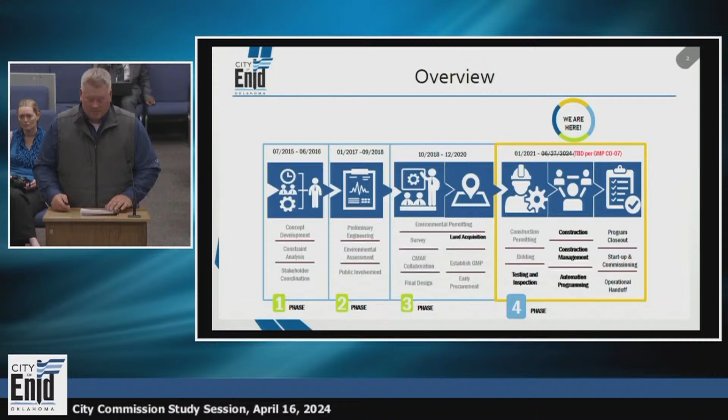The magnitude of the program is obviously a very large build with multiple facilities spanning 70-some miles from Kaw Lake here to Enid, and then the distribution within Chestnut. From a total magnitude, just over 2,400 submittals to date, and currently we only have 7 open. We've got 832 RFIs and growing, with 6 currently open, and 101 field orders to date throughout all 5 of those major facilities.

With regards to the major infrastructure, we have the intake facility, currently flagged at 93% complete out at Kaw Lake. The pipelines are currently flagged at 99% complete — I'll touch on the open items there. Intermediate booster pump station, 99%. The water treatment plant, 75%. And the Chestnut water main, I have it at 65%, but as far as open cut piping, we're actually more approximate to 71 or 72%.

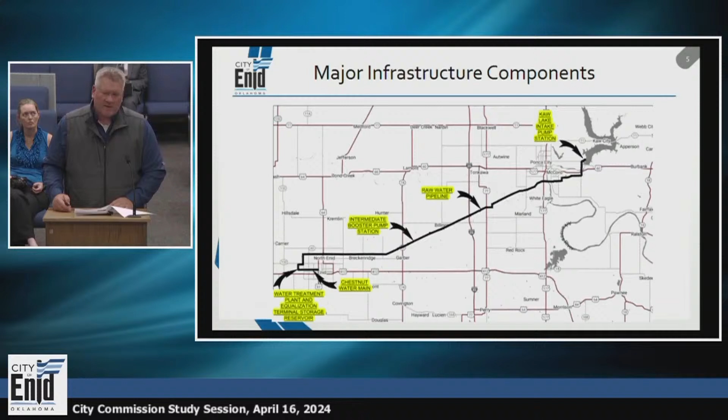The program alignment, again working from Kaw Lake, the 70 miles along the way for the raw water pipeline, 8 pipeline segments. Along the way, the intermediate booster pump station, and then here at Enid, the new greenfield water treatment plant, as well as the ongoing Chestnut distribution main.

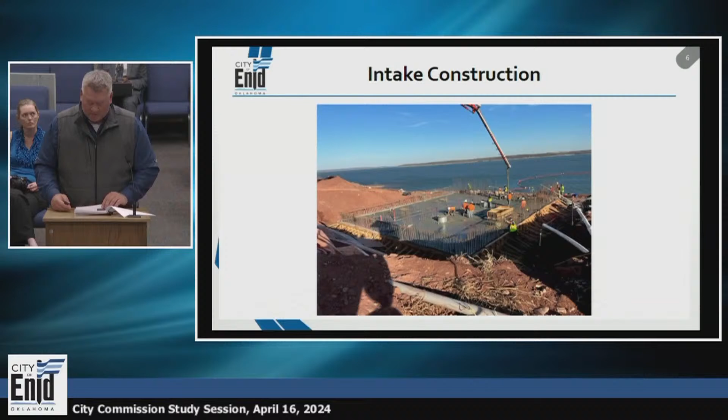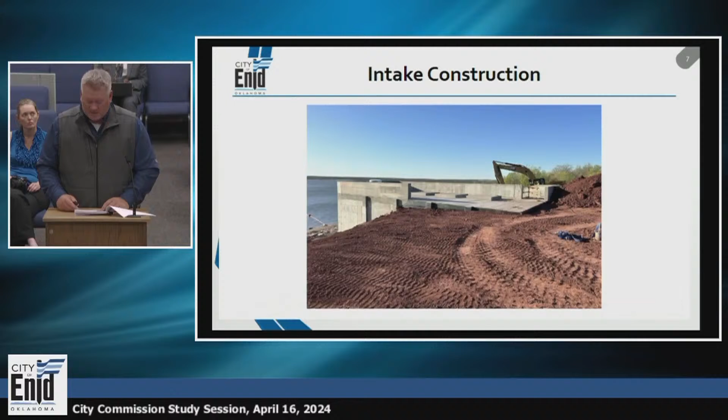This is an older photo at the intake site, showing placement of the raw water, or intake pump station slab. Today, if you make a visit, you'll no longer be able to see the slab — we used to do all the site tours and things of that nature. This is actually the roof panel above that pump station slab.

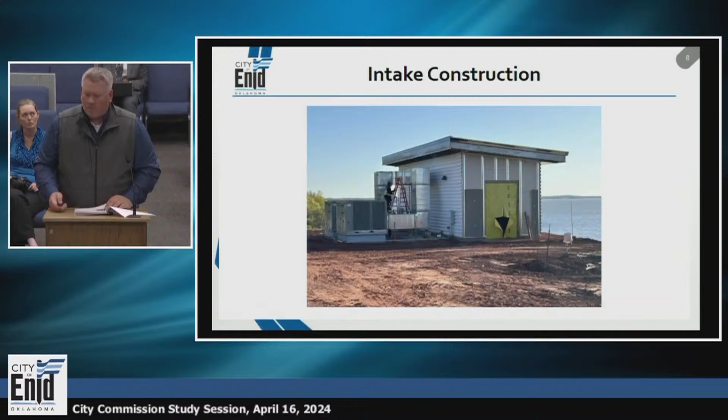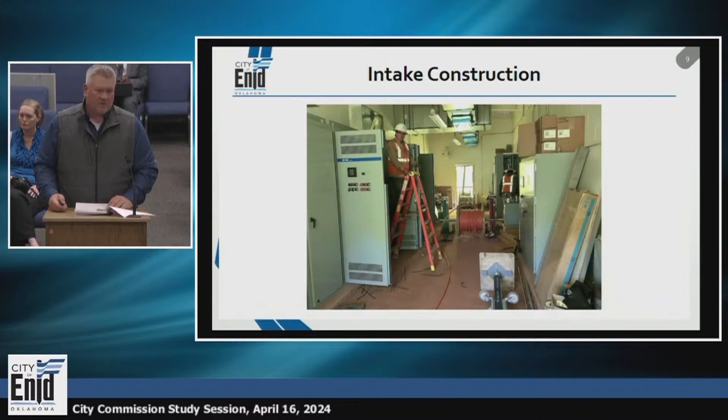This is the current progress of the intake electrical building and the HVAC system. Within the electrical room, some of the equipment installation is in preparation for final commissioning and some equipment startups there at the intake site.

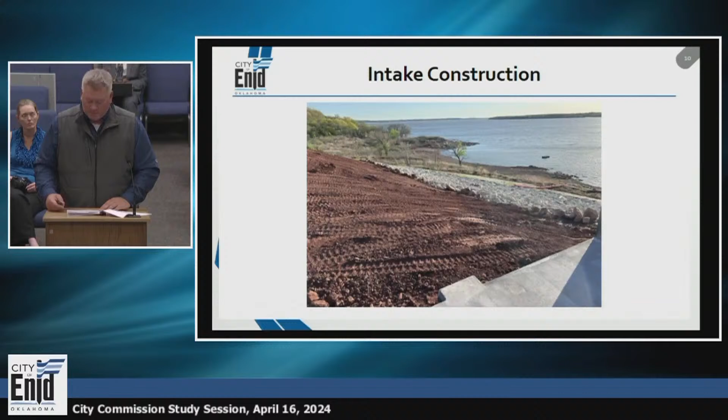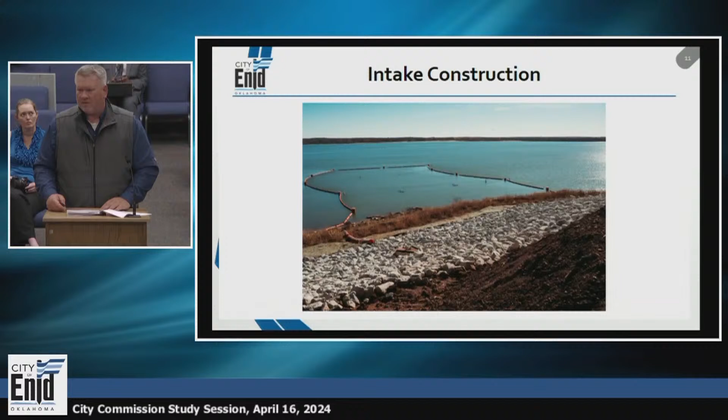Again, active site restoration, some of the shoreline protection and riprap. And just an older slide that had been presented before, to capture some of the riprap, shoreline protection, and the floating log boom assembly out within the Kaw Lake structure.

With regards to the pipelines, I believe in December my update was that we had successfully pressure tested 4 of the 8 pipeline segments. As of today, we've successfully pressure tested 5 of the 8, and we're working to secure segments 6, 7, and 8 in order to begin filling and testing of those, hopefully within the next few months.

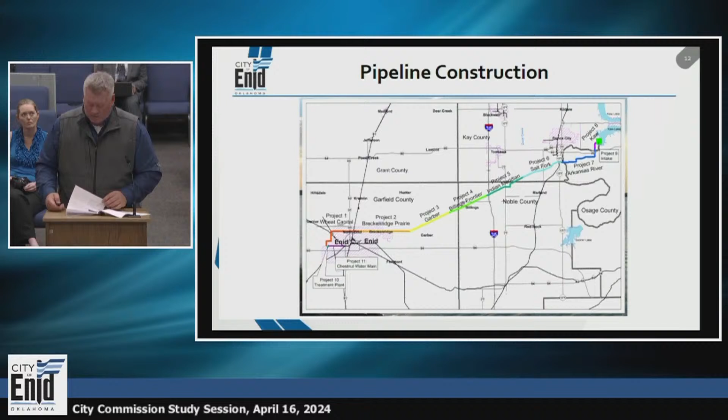As far as those percentages, the dark blue line working from Enid out towards Kaw Lake would start at the water plant. That depicts the portions of the pipeline that's currently been pressure tested to date. The pink colored line is segments 6, 7, and 8 — currently ongoing efforts within those segments.

We have a Bodart Creek crossing, a few hundred feet outside of that deepened tunnel crossing, up within segment 7. You'll see in the progress we just recently completed connections to the Ark West HDD. At the last update, that HDD was not on the table — East was. Unfortunately, at that time, we were 2,200 of the 2,400 foot complete. Today, we're at 0. They've since extracted that portion of the pipe string, and I'll talk more about that through the updates.

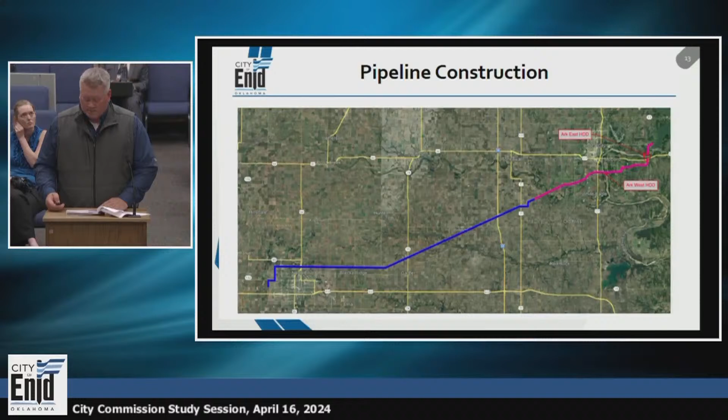A prior aerial depicting the USACE property out near the intake site. A lot of collaboration and work efforts went into securing those license agreements and helpful working environments, and they've just been a great entity to work alongside throughout the course of this program.

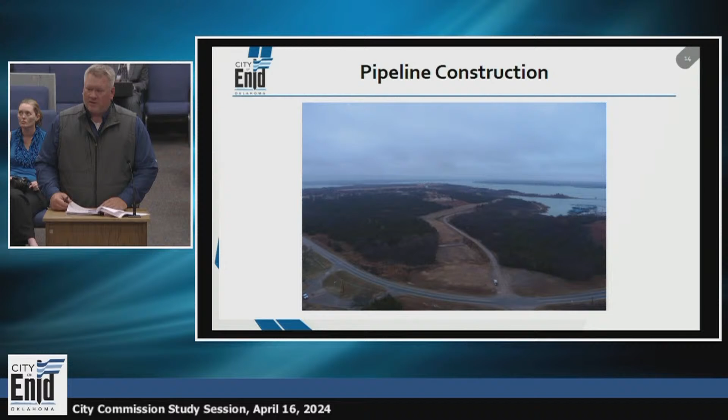Standing at Lake Road, this is within segment 8, an aerial photo depicting some of the final surface restoration. Again, this photo is a few months old — if I had a current one today, it would be a different color, of course, with the spring conditions paramount.

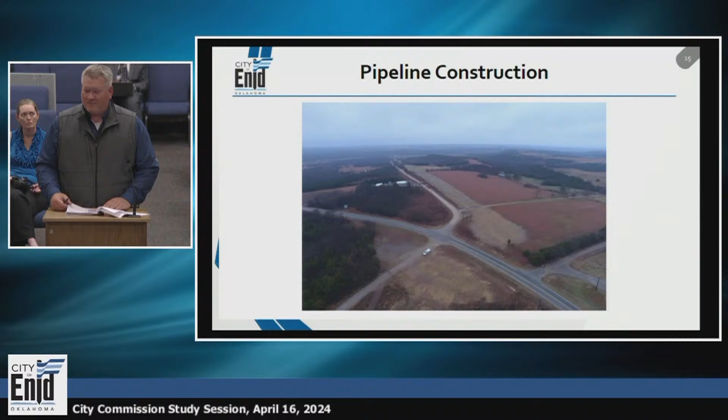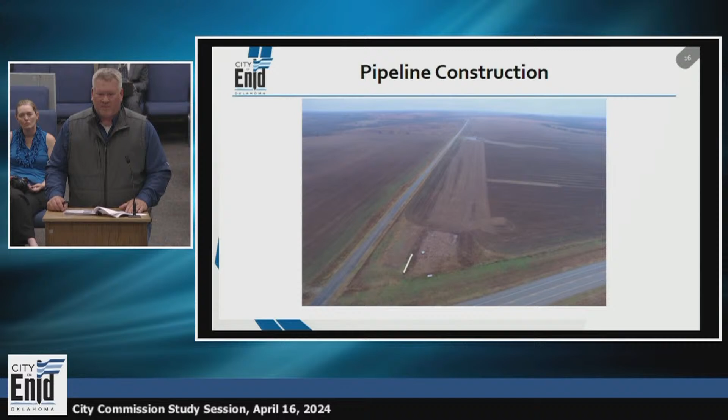I touched on the Arkansas East location — this is at Highway 60. The crews, the open cut contractor, will be transitioning back to this area within the next week, either close of this week or early next week. We left a short segment of pipe to allow working space for the HDD contractor. They'll thread that tunnel, secure that portion of the pipeline in preparation for that pipe string to be filled and pressure tested.

Earlier I'd mentioned Bodart Creek within segment 6 — we've got an excessively deep tunnel crossing this area. We're currently in the process of implementing and placing some of the vertical sheeting and shoring in order to accommodate that tunnel crossing. Hopefully over the next couple of months, that portion of the work is complete, all the adjoining open cut connections are facilitated, and we're ready to begin filling and testing of that pipeline segment as well.

This is a series of a couple photos of the Arkansas West, just south of Ponca City. We facilitated the connection on the west side, moving from left to right. The photo on the left is actually the 30-inch connection to that horizontal directional drill underneath the Arkansas River, and that outlet is an air release structure.

The center photo is actually the transition between the 36-inch diameter transmission main and the 30-inch diameter transmission main. From that point all the way out to the intake is 36-inch. From that point all the way here to Enid at the water treatment plant is 30-inch.

Photo on the right is just a representative of that final interconnect and the internal temporary test plug when we do initiate filling and pressure testing.

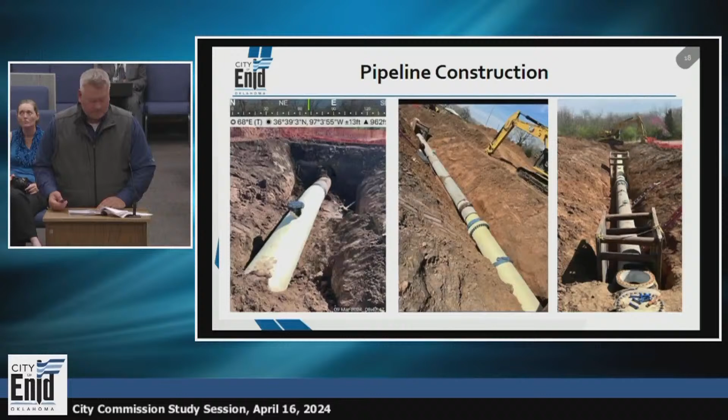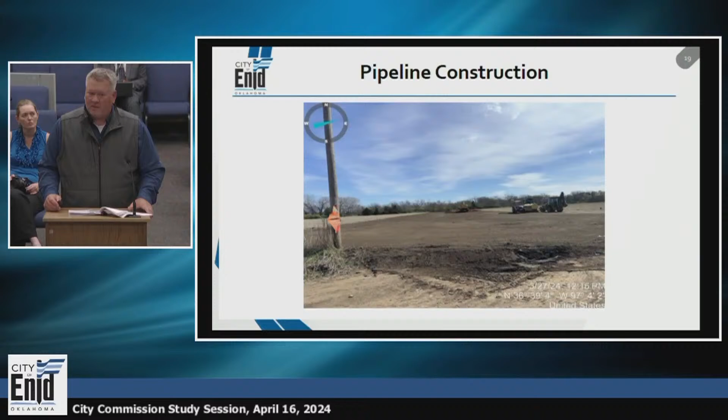This is that same area, final restoration, placement of topsoil. Again, we went through a series of coordination events alongside Ponca environmental representatives in order to facilitate this scope of work. This is a depiction of the final product.

On the opposing side of the river, this is also the Arkansas West connection, but on the 36-inch side. This work now is successfully complete. Crews have restored it, and that crew is finishing a transition in order to get over to the Highway 60 area that I just alluded to earlier.

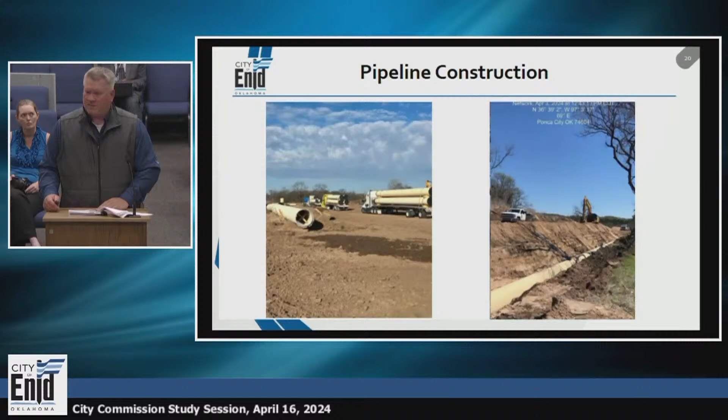Some of the final restoration efforts, one of the blow-off valve structures along the pipeline alignment. And I think from last update, there's some 200 plus or minus air releases and blow-offs along the course of this 70-mile span.

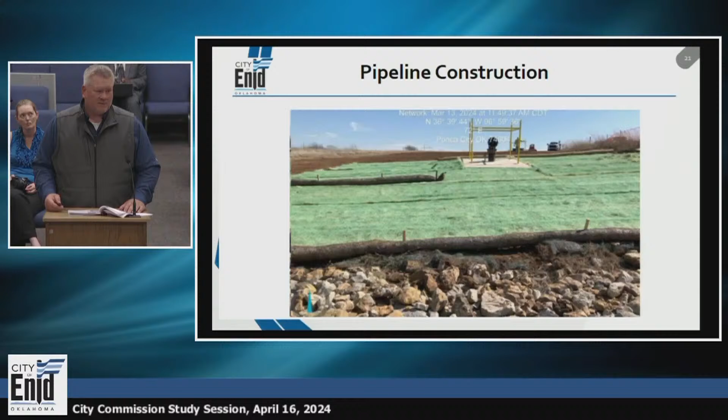Depiction of some of the final surface restoration. Some of the other ongoing activities over the next 1 to 2 months along the raw water pipeline corridor.

This is a final completion of the cathodic protection system. Currently those crews throughout the course of this month should make final connections and transfer permanent power supply. Outside of that, we'll work alongside the owner and engineering teams for final commissioning of that CP cathodic system.

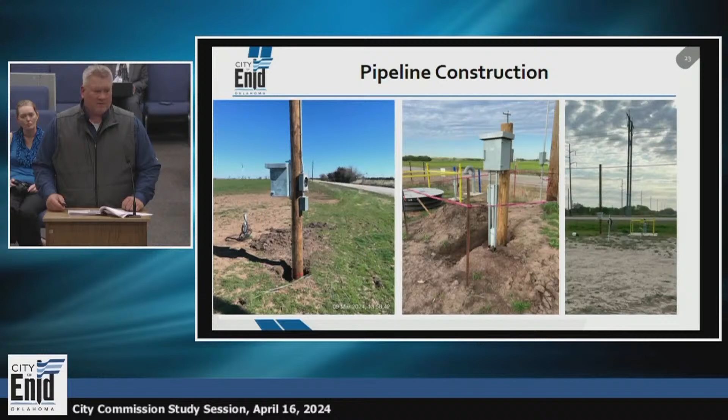The intermediate booster pump station. This is a security gate entrance to that 1 million gallon structure or tank.

Same photo, but on the opposing side. If you see down towards the bottom of that, that's actually the overflow structure. And then to the right side of that photo is the header pipe assembly in order to transfer that water supply and boost the pressure to take it onto the water treatment plant.

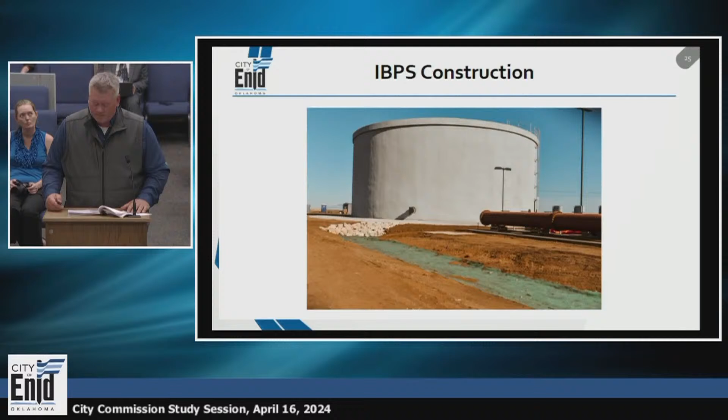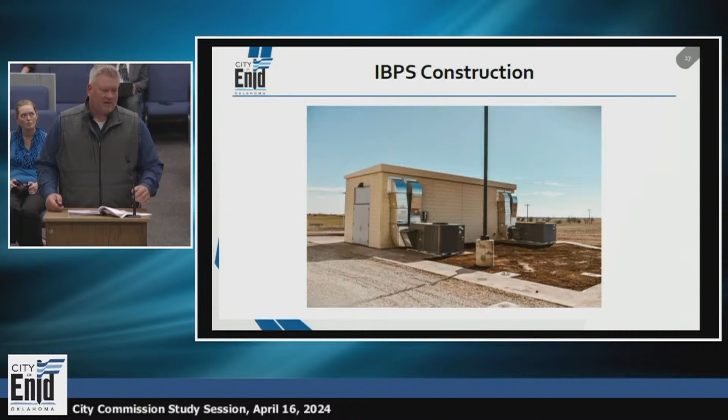Adjoining photo of the electrical building. A closer picture of the electrical building and the HVAC supply to accommodate the equipment within that building.

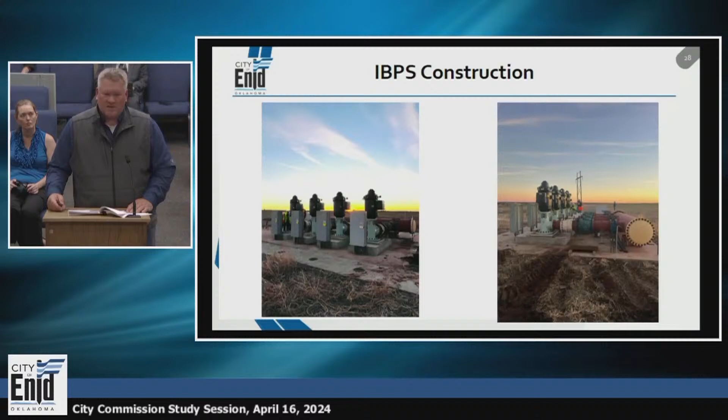Again, at the intermediate booster pump station site, vertical turbine pumps. And at the intermediate site, for all intents and purposes, work will conclude over the next 1 to 2 months at that site as well, just into final commissioning and startup when that time comes.

Water treatment plant. This is an older aerial. We'll continue to reference at all the major facilities. Again, if you have the opportunity to visit any of these sites, please take it upon yourself and do so. There's a lot of active and ongoing construction. Things have changed considerably day by day on particularly the plant site with things going vertical.

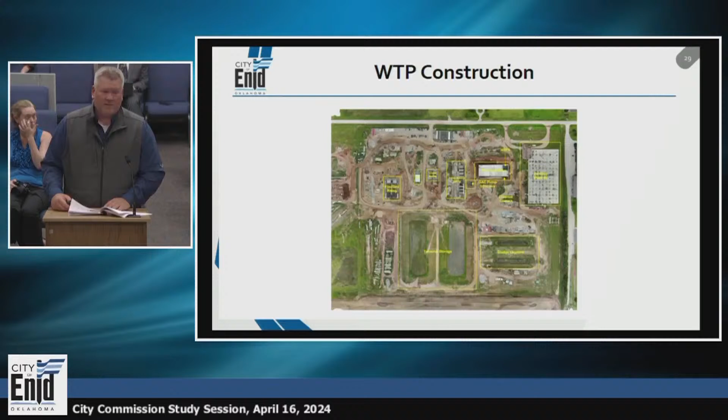Okay, this photo, zoomed in aerial to the lower portion of the screen. You got the TSR and the sludge lagoons, the existing plant structures, and up here towards the front of the screen, this will be the filter admin building, and I'll touch more upon that structure.

But for the most part, all activity within this site will be coming to a close in the summer of this year, but there will be continued focus within this portion of the build at the filter admin building, and I'll touch on that in more detail.

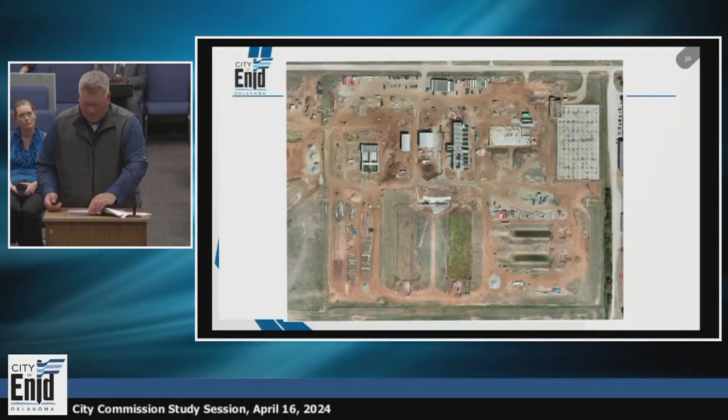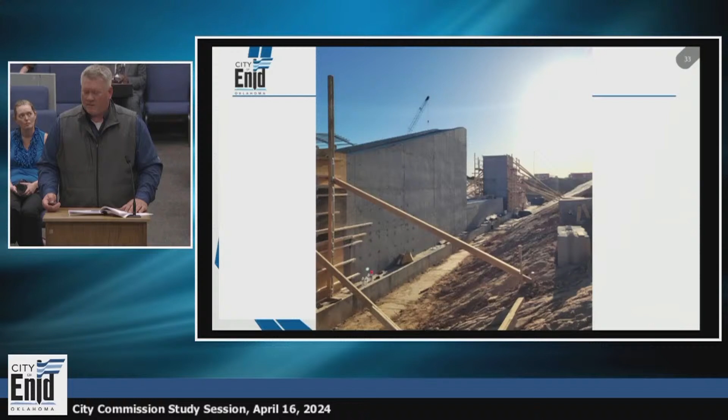This is one of the TSR inlet structures, terminal storage reservoirs. This is a TSR outlet structure, and I've got a couple of photos of that. Final concrete and civil placements.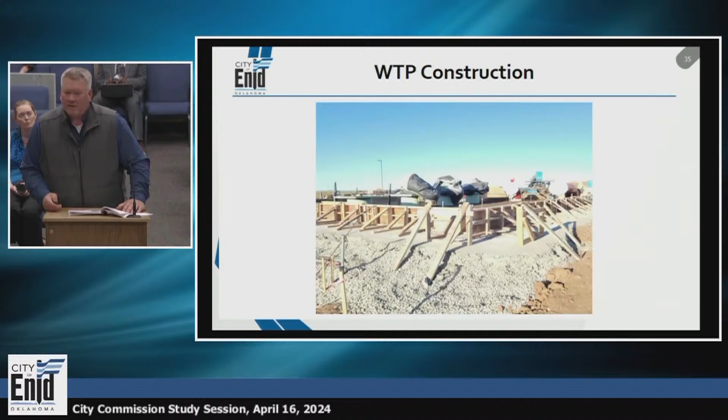This is a raw water pump station slab, and I did not get a final update, but this slab was scheduled for placement today. Not sure whether that happened, but it's very imminent if it did not occur today.

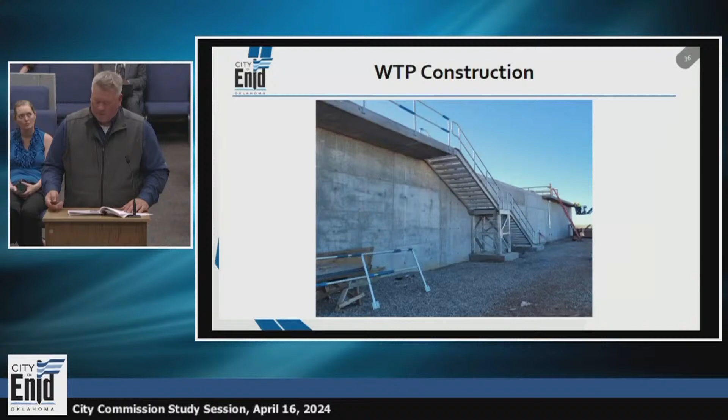Some of the final pictures of the floc sedimentation basin. This is facing west, capturing some of the stairs and miscellaneous metals. Same structure, but facing from the north. And then again, from the southeast corner, capturing some of the electrical conduits as well.

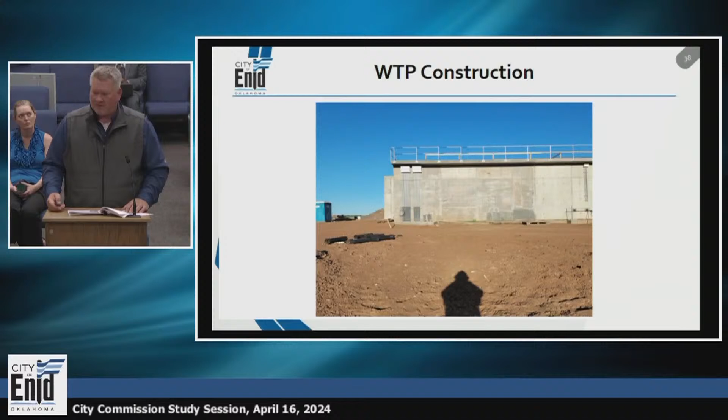Up on top, some of the baffle wall assemblies within that facility.

Within the ozone facility, these are the injection wells. There was a multitude of examples where we had CMAR collaboration throughout the design. This is one of the value engineering components of the project, going from concrete to stainless steel contactors, and there's a host of examples throughout the program where this process yielded very significant cost savings.

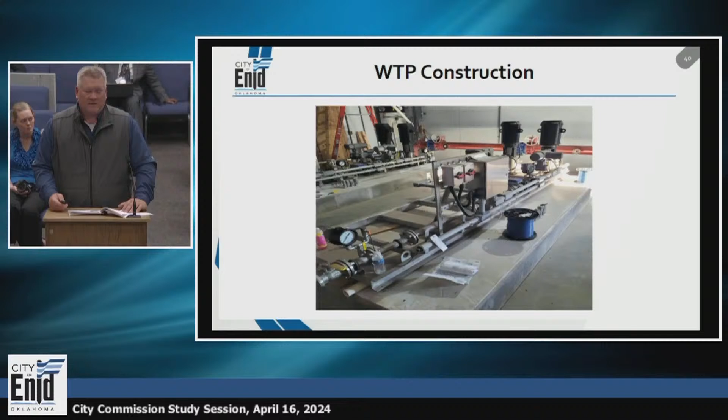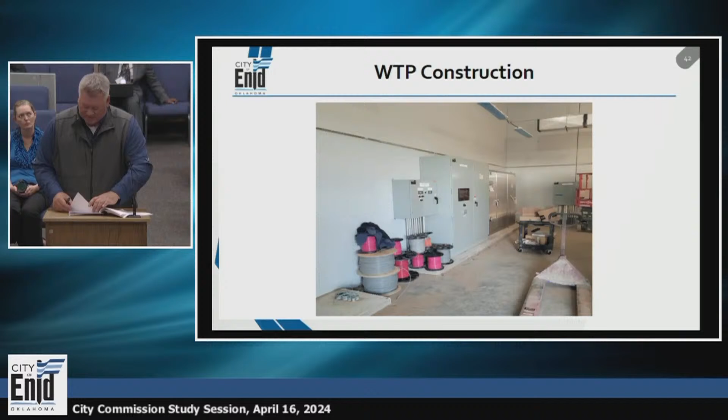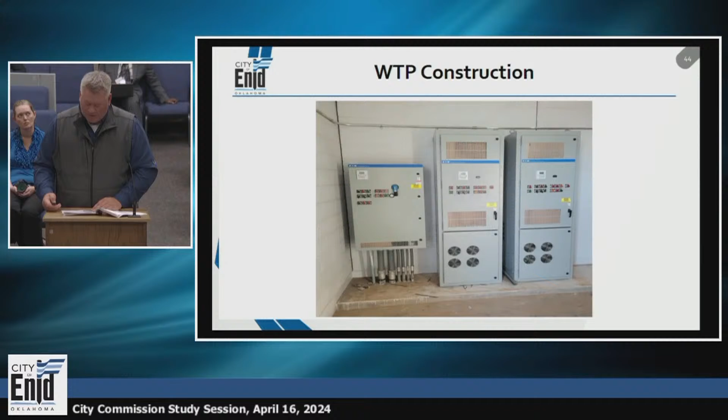Another photo of the ozone injection skids. Within that facility, the ozone electrical room, and that panel in the center is one of the HMI screens. Switch gear that's been placed within the ozone electrical room, and various control panels. The ozone facility also has a standalone backup generator supply specific for the ozone, and then some of the HVAC assembly that's been completed within the ozone room.

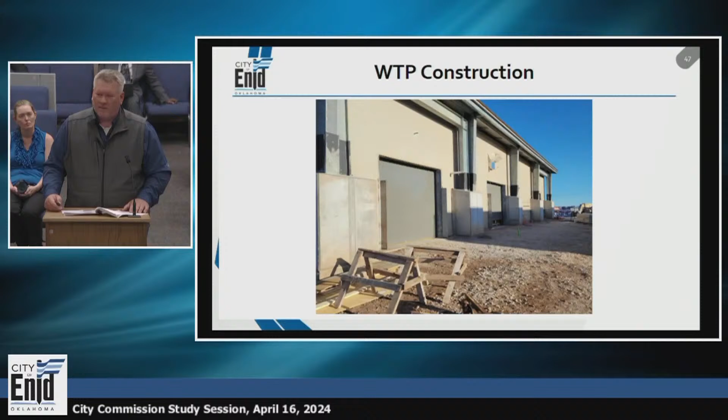This photo captures some of the concrete pilasters and final prep efforts in order to place the masonry veneer, to get the final aesthetics of these facilities and structures.

The City of Enid has a contract for the LOX equipment. This is the excavation in order to begin prep and placement of the pad to support that equipment.

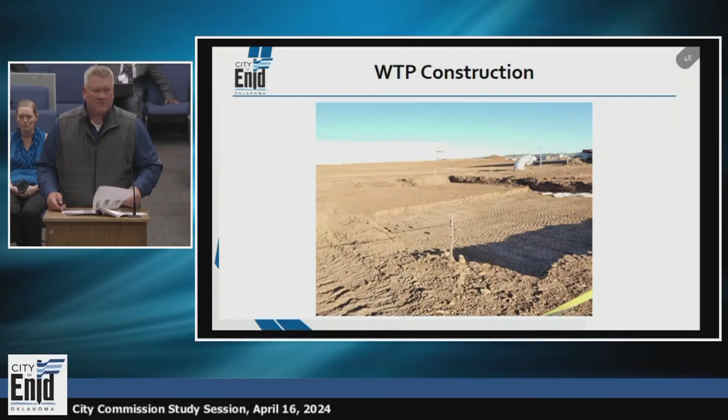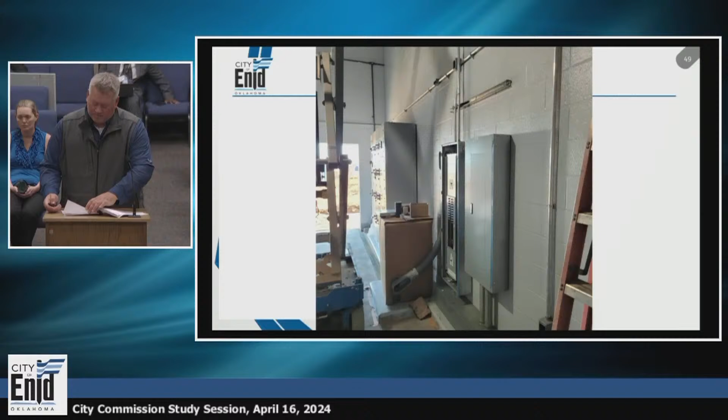More electrical installation within the chemical building. The west plant, facing north and working from right to left, we have the chemical building, the ozone building, and then the floc sed building.

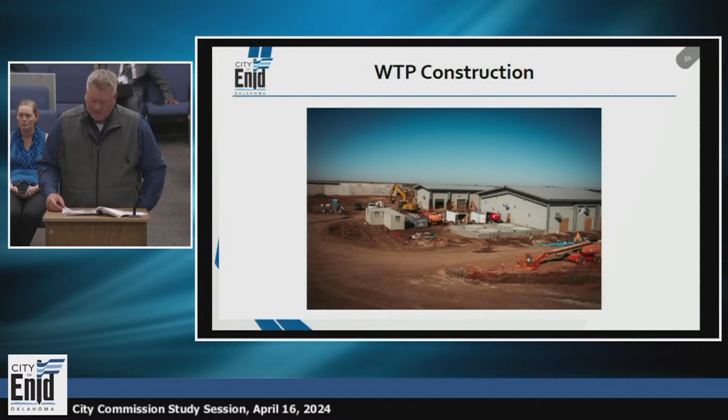As I mentioned in one of the prior slides, this here will be the primary focus for us for the foreseeable future outside of the other ongoing efforts. This filter admin building, this picture captures...

The elevator shaft and placement of the structural steel. In the near future, over the next one to two months, we'll transition to the deck panels and the wall panels and begin some pretty extensive build-outs of that structure.

This structure has some long, lengthy delays that will compromise the critical path of the program. But the importance of this structure is that it's where the entirety of this program would be serviced and operated from, so it's important that we get this piece of the puzzle correct and right. I'll talk more about the projected timelines and what this means for the overall program.

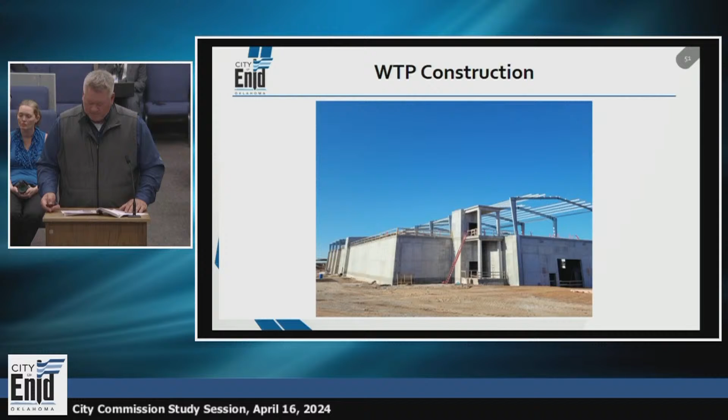Another look at the filter admin facility. Some of the pipe galleries, and I've got a series of two or three photos of work that's happening inside of these structures.

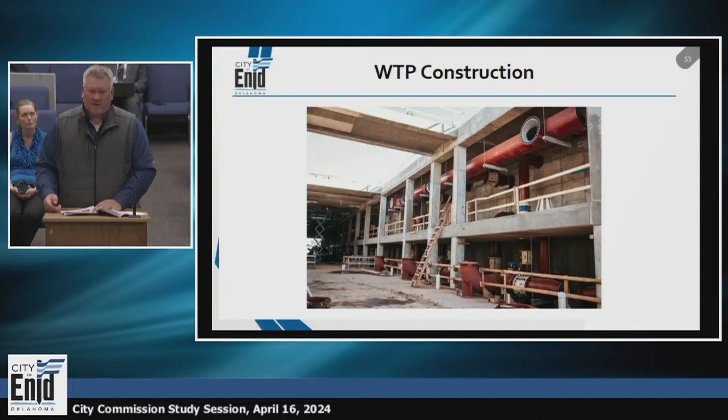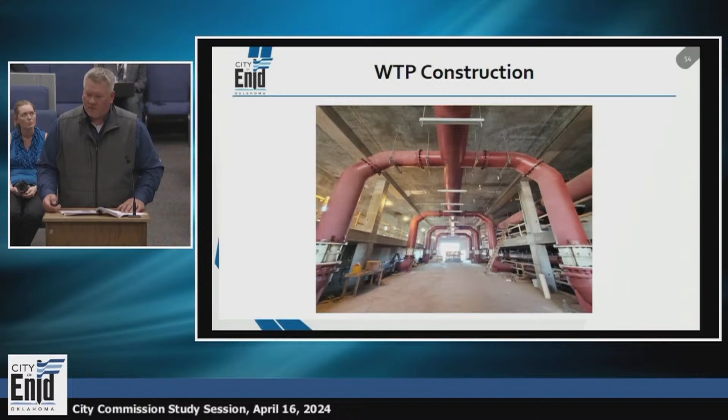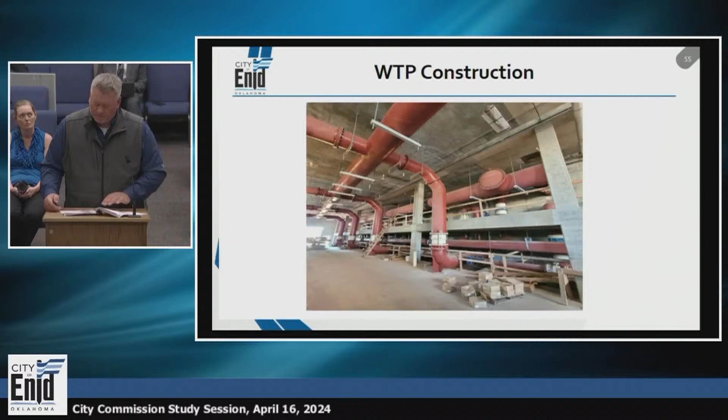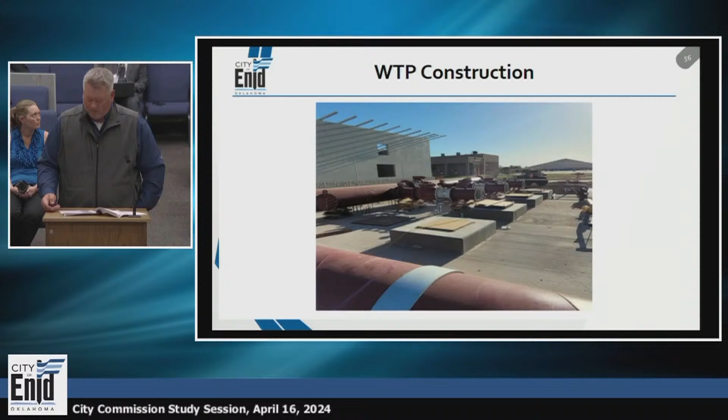Outside of that building, the high service pump station - see the vertical turbine pump piping assemblies. Again, looking back towards electrical buildings, some of the CMU walls and the metal truss installations. High service pump station roof trusses.

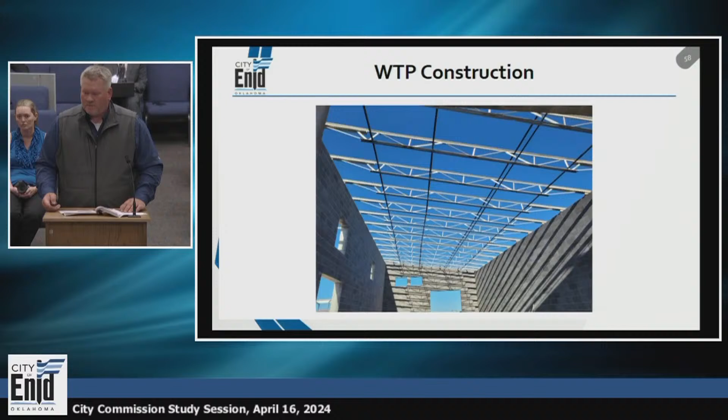I felt it important to keep this older photo. One of the many unique features to this Kaw Lake program is it's a blended water supply. This area here, actually buried and out of sight, out of mind today, is actually where that happens - the blending of the surface water and the existing groundwater supply.

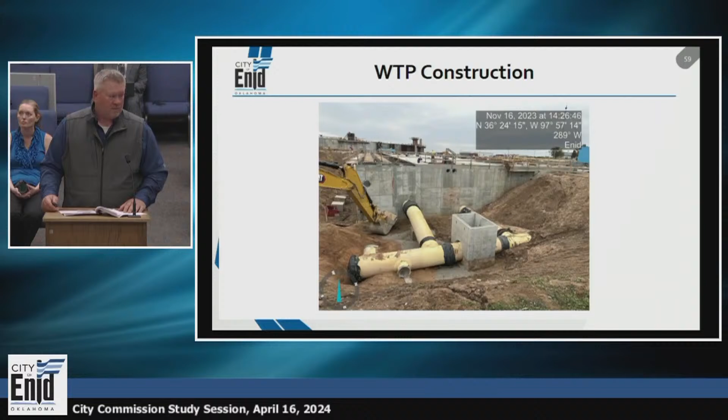Chestnut water main. Well, from December, we've come quite a ways. At that time, I think I'd presented on some traffic controls and phasing plans. But generally speaking today, we still have some ongoing work happening right here at Garland intersection. We've got a tunnel that's all but complete.

Some open cut piping will join that tunnel once that's in. But generally speaking, starting at the plant, we've successfully completed installation through Garland, all the way through Oakwood, inclusive of the HDD. We're currently transitioning our crews to the east side of the area now to begin those connections. Once that tunnel's complete at Garland, we'll back up and complete those piping interconnects. That's roughly 71% of the alignment.

And again, while we're on this, we'll need to orchestrate and communicate a complete road closure east of Cleveland, as that portion of the alignment runs north-south across Chestnut to tie into the existing 24-inch main. But a lot of communication with Morale and staff as we begin to solidify our upcoming scheduled phasing approach for those efforts.

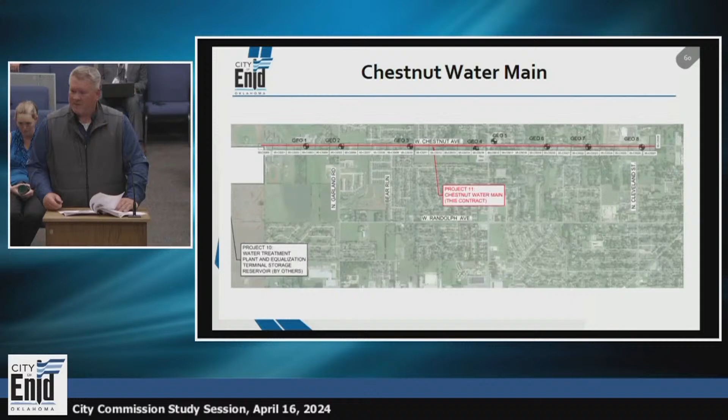Some photos of the restorative efforts. The photo on the left is some of the final prep for the 36-inch HDD that was constructed. The photo on the right is general gradage, surface restorative efforts along Chestnut.

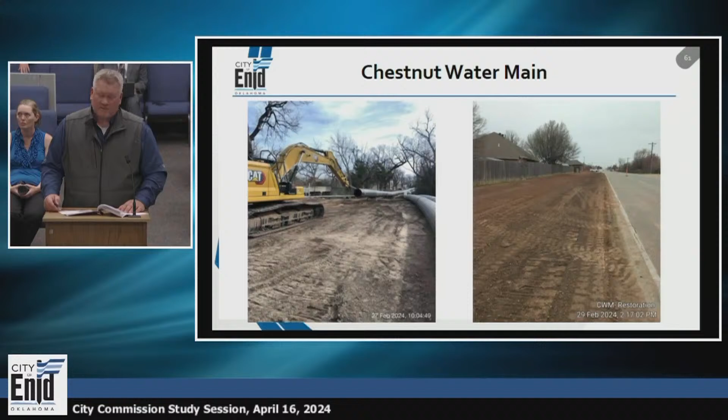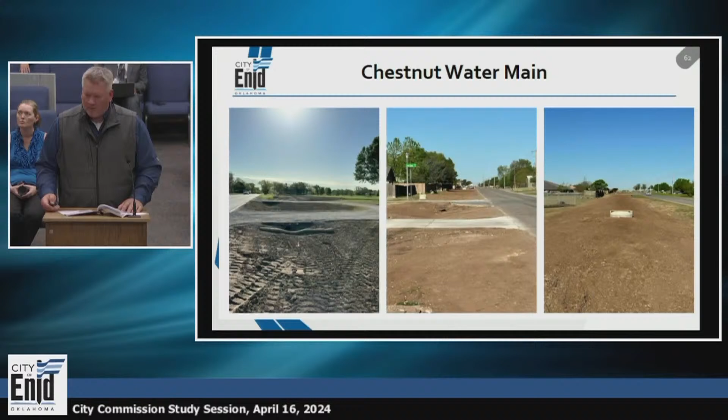The next three photos show a series of driveways, streets, and one of the precast manhole structures to accommodate the combination air release valving. Again, more of the driveway and street crossings, and some of the final restoration efforts near the 36-inch HDD on the right.

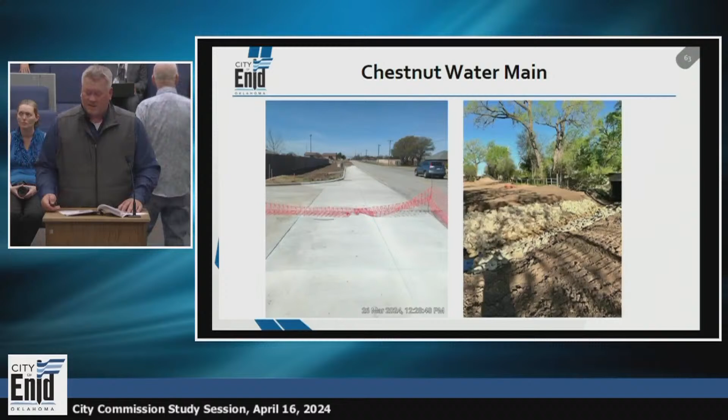And we knew it going into this project, on some scale, all these projects yield some form of public disruption. What can we do to try to minimize that? I think it's important to show these slides. We went to extensive efforts with sound walls and other things to try to do right by adjoining homeowners. Fortunately, this portion of the build is 100% constructed, and those HDD crews and operations have since demobilized.

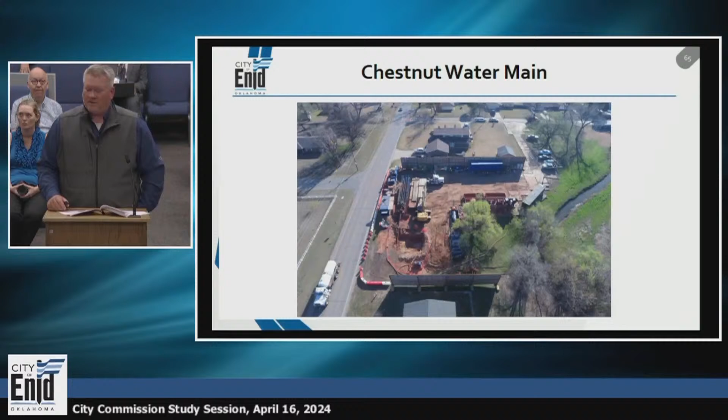Got a few other aerials. This is at the directional drill rig, and the aerial is facing east. That's on the opposing side of the drill, facing back west on the pipe string.

To maintain positive ingress and egress, we had to do that in a series of two pipe strings in order to keep the homeowner access to the property. As the time neared, we coordinated a temporary closure of the driveway, and then we facilitated the final pullback.

Kind of the same area, turned around 180 degrees, facing back east towards Oakwood. So a lot of disruption that we mitigated and avoided by construction of this horizontal directional drill, the public school systems, et cetera, throughout that portion of the alignment.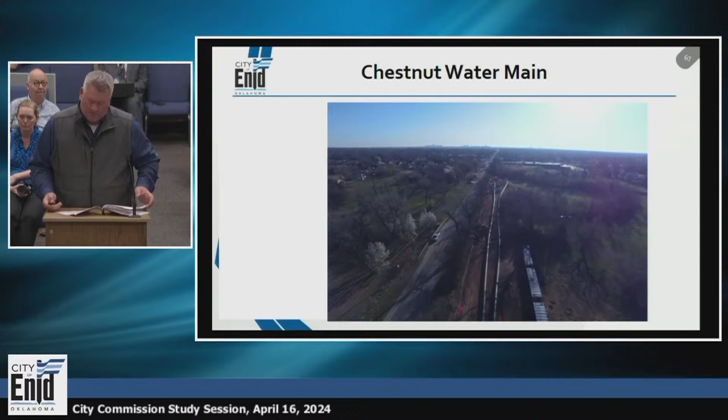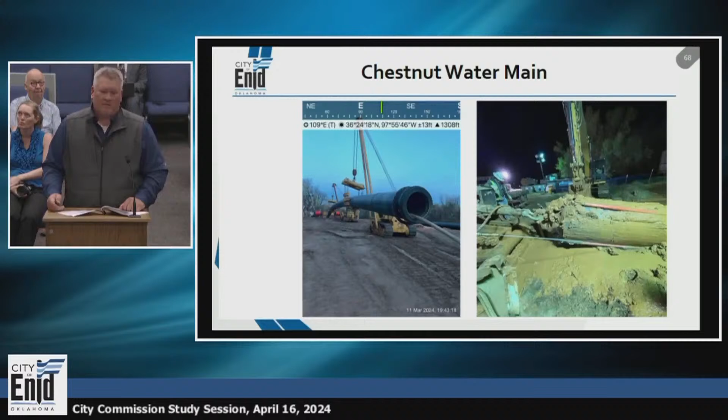And again, a couple of the closing photos - successful pullback of that HDD, and we'll continue efforts forward. This portion of the program is still on track by summer this year for final completion. Again, roughly 71%. We'll need to work through coordination and timing of final filling, testing, and disinfection alongside city staff, but everything is tracking right where it should be currently in this program with regards to Chestnut.

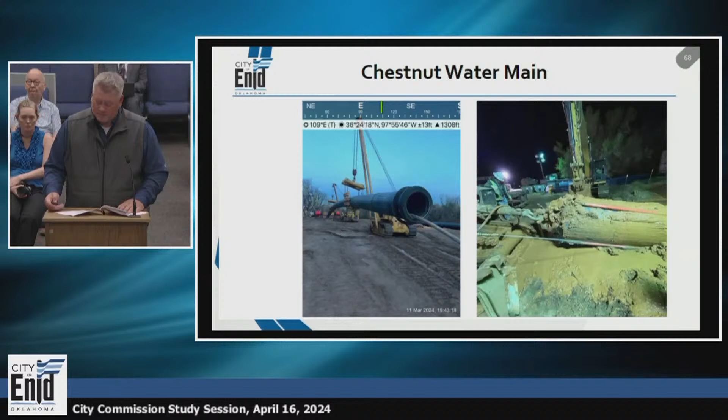Any questions on construction before I transition to some of the financials and then projected timeline update?

I've got two questions. On the Bois d'Arc, you said excessively deep - how deep is that when you went underneath that? There's roughly a 40 vertical foot excavation to that piping structure.

Okay, and you'd also mentioned extensive delays in the filtration building out there. Yep, I knew that there were some things that were out of your control. Can you speak to those just a little bit? Certainly - very complex structure, and timing of getting some of the things that we needed in hand to facilitate release of materials. Everything is compounded in this market we're in with COVID and availability of materials. So if we miss a mark and miss a deliverable and something gets delayed, that could have a compounding effect. But generally speaking, that facility itself is going to incur about a one-year delay to the program from a high-level standpoint.

Okay. Okay. Anything else? Oop.

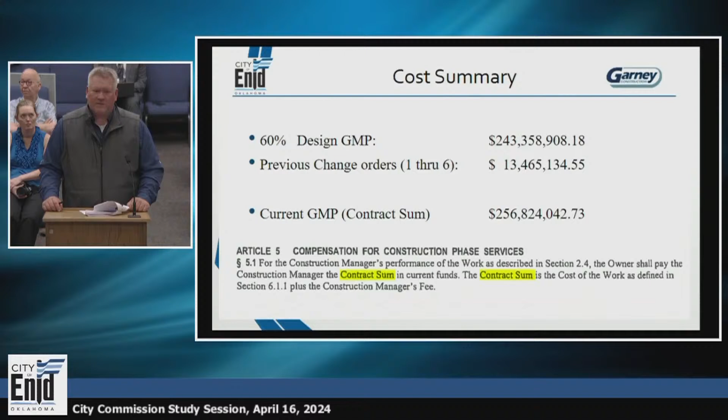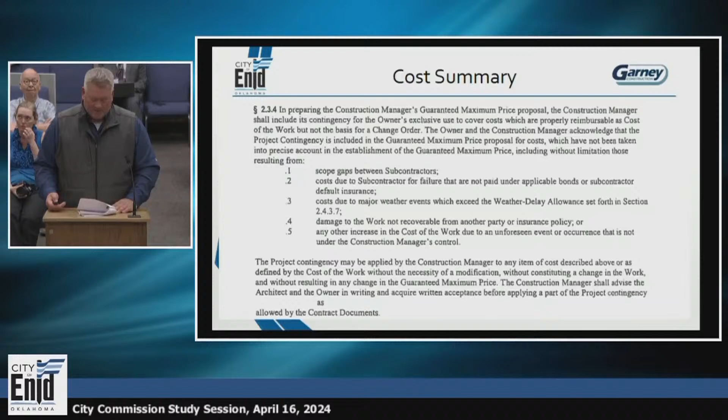Also within the program, and it's an older slide that we talked about before, CMAR contingency. A number of items within the program we've applied CMAR contingency to date. Right now is our current summary of the 8 CMAR contingency requests to date. We had roughly $4.4 million of total CMAR contingency, with currently $993,000, or just under $1 million, remaining throughout all those 8 requests. Now granted, those 8 requests are very itemized - there are multiple components within there, but to roll them up into presentable format, there's been 8 prior requests to date. All 8 of those have been authorized by the city. When I stood before you in December, not all 8 of those had been authorized at that time.

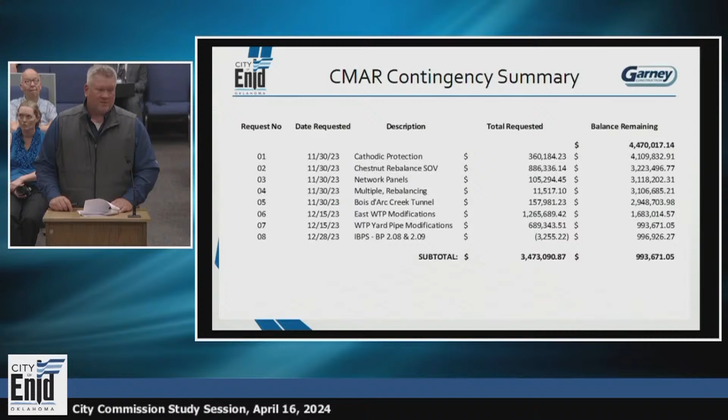And what does this really mean? Part of what Garney did throughout the onset of this program was try to remain a good partner for the city. We had donated essentially a big chunk of the CMAR contingency to fund design progression that would normally be presented to City Commission for a GMP change order amendment. But due to the financials of the program and the desire to try to maintain the budget, roughly $3 million of this $3.4 million was for design progression that we've agreed to stand up and be a good partner for. That's what got us to where we are today.

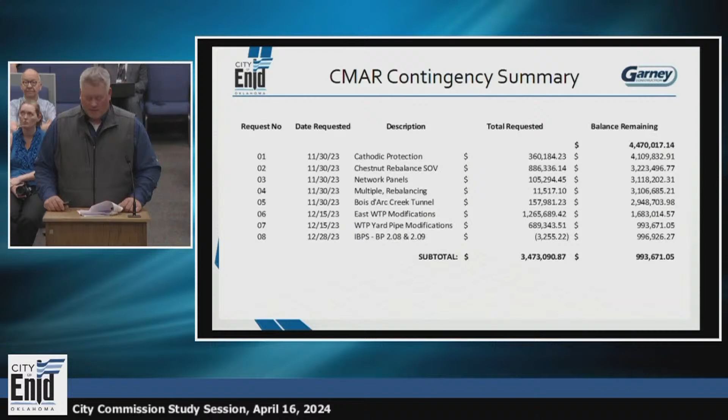We've still got a ways to go in the program. Obviously, I've talked about extension of the schedule and what that might do for final commissioning and startup. And I'll touch on a few of those in this next slide.

Change order number 6 moved Garney's substantial completion. That's what we refer to as a manual startup. Garney has that from a startup standpoint within the program. The city has contracted with Garver to handle the automation component, separate and independent from Garney. We'll be working in a unified, collaborative manner through a serious portion of that, but it's important to know we each have our own responsibilities. We get the systems ready, Garver takes over and implements the automation component.

Our current milestone is June 27th of 2024. At this point, we think it would be ready for a manual startup by spring of next year. A couple of caveats to that - we need to work through the laboratory component, and what that may or may not do to Garney's demand for manual mode startup. Worst case, that's looking like summer of 2025 if we include and incorporate the laboratory within that filter admin building part of the process.

Again, for this to be a turnkey functional unit, I'd reference the elevator shaft and a few other things earlier in the presentation on the filter admin building. We have to get to near final completion in order to secure a building occupancy permit, so that structure can be staffed by city employees in order to operate this treatment plant.

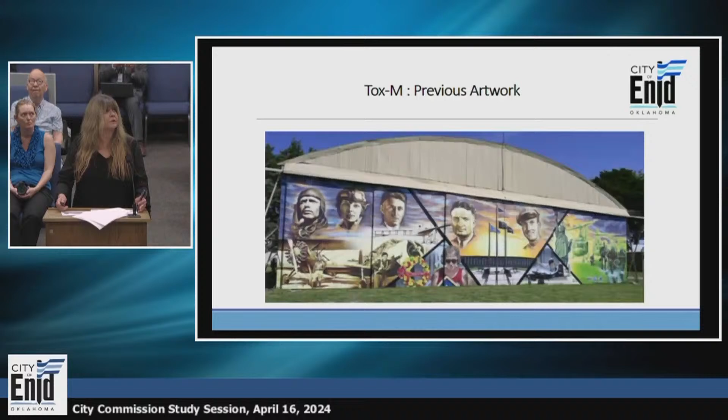Thanks, Ron. As Ron stated, it was a bit of a process to get us where we are today. Our first concern was... let me get back. Which button gets me back? There we go, I want that picture.

We were concerned — originally the idea was to paint the mural directly on the wall. Then there were a few conversations about whether that would be a good idea, and we started brainstorming other concepts that might work if we didn't paint on the wall. Finally, Christy, Ron, and I sat down and determined that maybe we needed to leave it up to the artist to decide a concept where we would not paint on the wall but still get the mural we wanted for this building.

So we put out the RFP. It went out last December, and our submission deadline was the 15th of January. We got 9 submittals. Our original plan was to narrow it down to 4 artists, but we actually had 5 that we really loved, so we wanted to see what concept they would come up with for this building specifically, based on the criteria of our RFP.

We looked at past works that they had done. Some had a few related to MLK, others had just done portrait-type murals, which we knew we were kind of going for with this project. We held a lot of meetings.

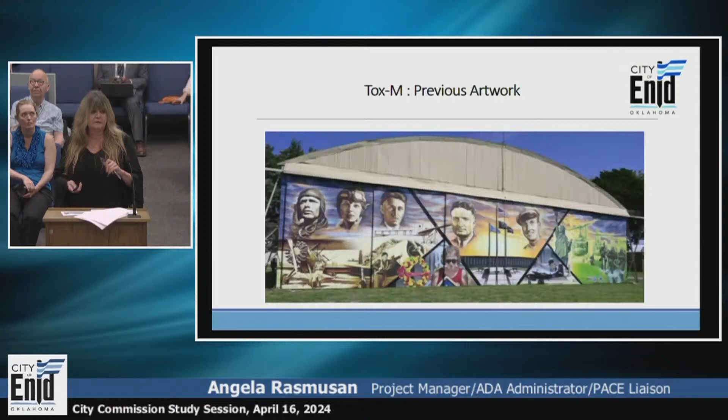This project is going to consist of a mural painted on ACM, I believe it is. And Terrell is going to construct a frame, so they'll be up here in a minute to speak to that. I think if you're local, you know Tox's work. And some may not be as familiar with Terrell, but he's done signs here at the city of Enid for years, and he produces some great artistic work as well. So with that, I'll have the artist team come up and they can speak to you.

Hello, everyone. Hi.

This project would be a project where essentially I would do the first half and then I would turn it over to Tox, basically giving him a canvas to work off of. Being a sign maker, whenever we had this request brought to us, I thought to myself, how would anybody build something on that wall without getting the paint on there? So I just went straight to my sign work because I'm also an artist. But for those that don't know what ACM is, it's aluminum composite material.

This sign frame would be constructed out of 2-inch aluminum square tubing, structural, and it would be made out of 4 pieces to be able to haul down the highway, US DOT regulations, and be constructed on site in 4 pieces, one by one, bolted together, and then essentially bolted into the building with 3/8 concrete anchor, which has a shear weight of 5,400 pounds.

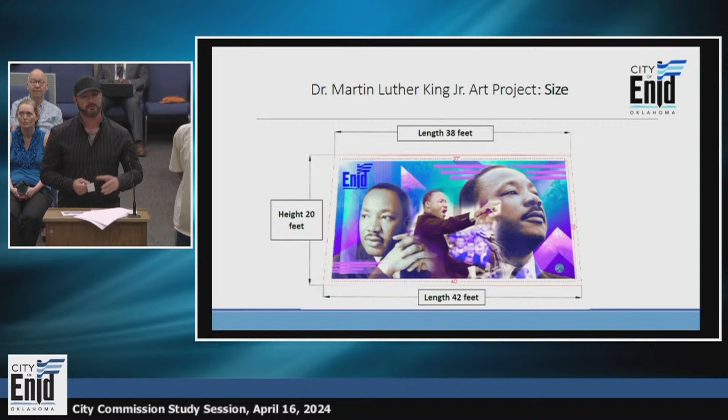This sign's not going to weigh anywhere near that. Once the sign frame is constructed and bolted and put into place, the ACM panels would then be adhered to the tubing with a different screw, but it would only penetrate into the first half of it. That eliminates hundreds and hundreds of screws being put into the building. I think we would still have to put somewhere between 75 and 100.

There are some joints in the building that we would want to avoid, and I would do that on site once we got to those questions in hand, because part of this mural will be three-dimensional. It would have a second layer of square tubing that would be placed on the main canvas, and certain portions of it, some of the elements in the art will be its own layer. Once that's all done, Tox would come in and paint everything that you see in the submittal.

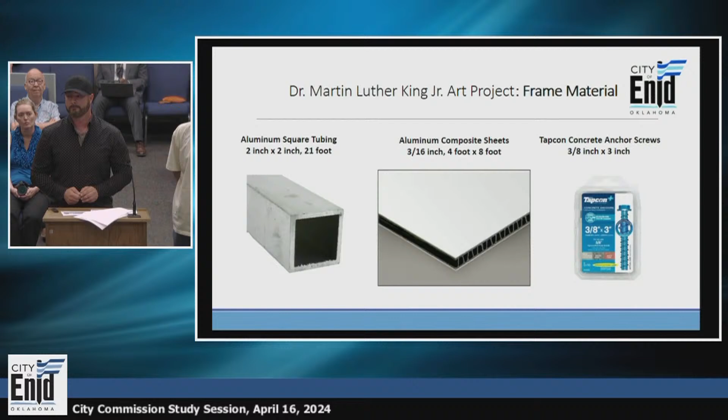Can we ask a question? Yes, I'm sorry. Does anyone have any questions? Is it gonna be on this wall right here? Yes. Okay, so is it slanted? Is that wall slanted? It does have a 5-degree slant. Will the picture actually have the slant, or will it be, you're gonna shim it so that it's straight up?

We talked about shimming it out. It'd be about 15 to 18 inches if we had to at the top. Looks like birds, things like that, getting back there, we decided to just let it be 2 inches and stay with the 5-degree slant of the building.

Is it gonna center on this wall? It'll pretty much take up the whole wall. Oh, wow. What about the flagpoles? I'm sorry. The flagpoles? The flagpoles will just stand in front of it.

We looked at possibly even painting to incorporate the flagpoles in there, but driving by multiple angles, Tox and I have been out on site several times. We decided against that. I think it's just going to be its own piece of art, and it's going to be so big that you're going to see it regardless of the flagpoles.

How long will it take you to do this? I think it's going to take close to 2 months. I think it's going to take me anywhere from 4 to 6 weeks to build the frame, and weather will be a factor with Tox's portion of it, but he's actually probably going to be faster than I am.

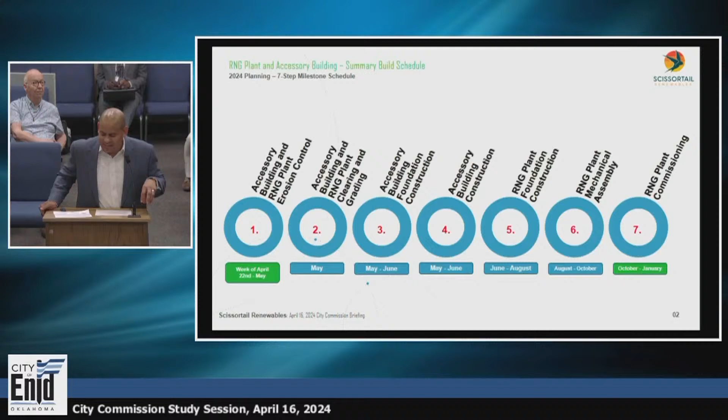The summary I'd give can't be better than your agenda item, which in one paragraph did what we've been attempting to do for the last 7 months. It's something supported by staff, that benefits site flexibility and entry and access, that makes us next door to the interconnect lot, that provides fencing and visibility with an engineered fence, and most importantly, avoids the existing easements that were potentially unresolvable in order to meet our schedule.

So what I'll do now is turn it over to John and take some questions. Appreciate your attention, time, and interest in our project. Hopefully by the end of this month, you'll begin seeing what's shown on the screen: erosion control measures beginning on the property.

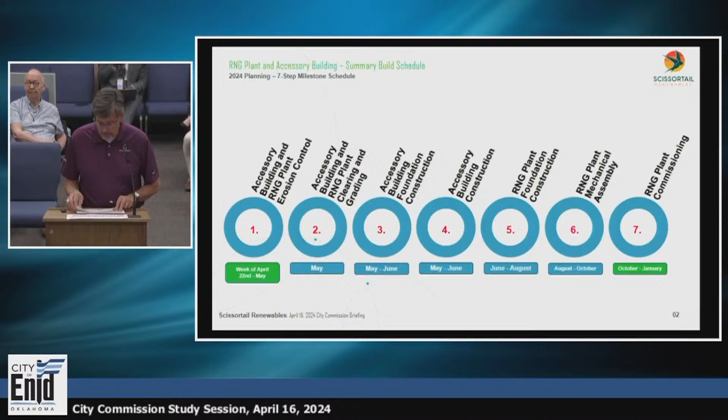The grading's pretty good out there. We're up on the hill, so we'll do a little minor grading. We got our coring results back from the geotech — we're above the rock. Our first spot had issues with rock and we shifted it, so it appears, as they say, third time is a charm here.

In terms of schedule, we have our contractor ready to come out next Wednesday and start putting in erosion control, so we're ready to go to work next week. The week of April 29th, we're ready to mobilize, work with the folks at the landfill to get a temporary gate in and access for our construction entrance off of 16th Street. The site also lets us create a through access to Southgate, providing a second entrance off Southgate. I'm sure the fire marshal will like that, since it gives a nice pass-through from one end of the site to the other, making for good circulation.

In terms of visibility, we have to build a security fence anyway for the site, so it's our intention that on 3 sides — west, north, and east — we'd put up an 8-foot composite fence. It's a 25-year product, so in essence it's a visual screen, and it also works as a sound barrier, so any sound from the equipment is projected upward and not outward.